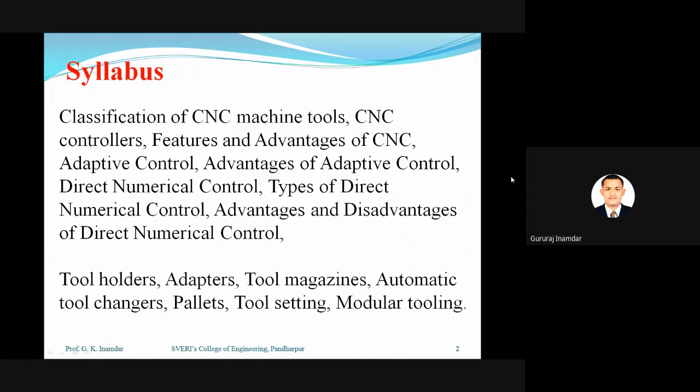This is a combined chapter. Already we have studied what is CNC. CNC is nothing but a numerical control system in which data handling, controlling sequences, and the responses to input are determined by an onboard computer. Only the computer system is added in between CNC and whatever the programmer does. This is the only difference between NC and CNC machine.

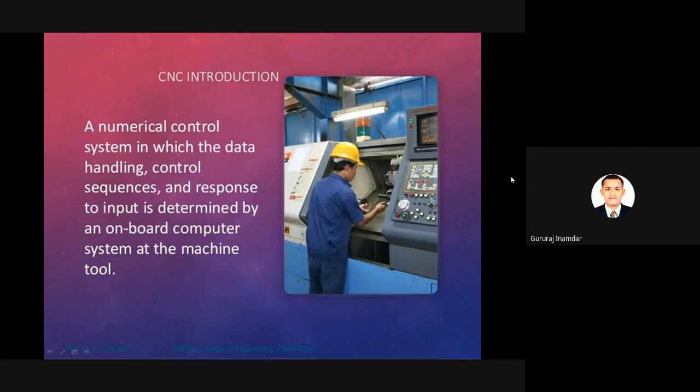Different types of CNC machine we already studied. So many types are there, as per industrial requirement or whatever the manufacturing requirement is concerned. We can manage, we can create a program as per requirement. For that purpose there are a number of CNC types. We already discussed that.

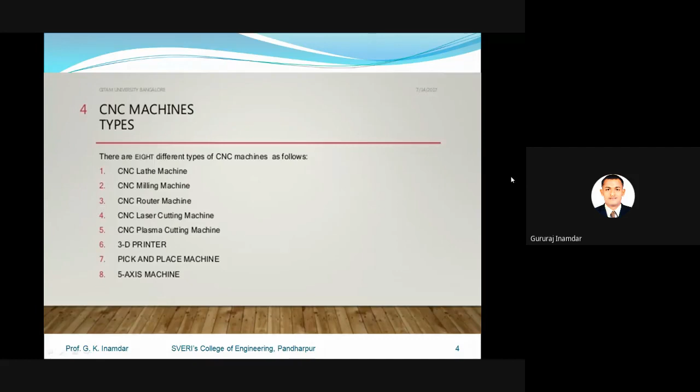CNC machine has two important parts: storage of data and data processing. Without computerization, man will not be able to store maximum data. Our pen or paper is very difficult to use to store data. For that purpose, we have used the computer system in the manufacturing system. Storage of data and data processing, due to numerical and mathematical problems, mathematical processes, becomes very easy for the computer. Controlling of that process is also very easy for the CNC machine.

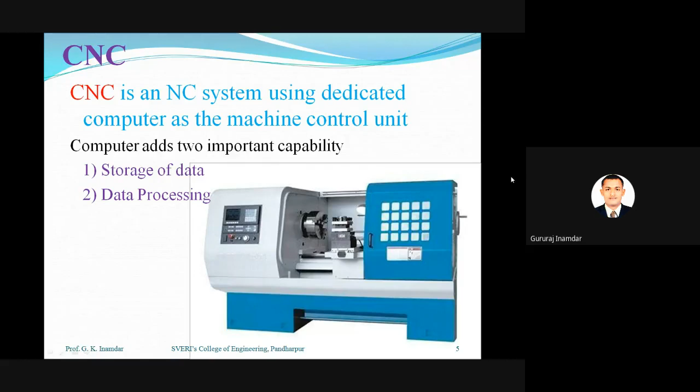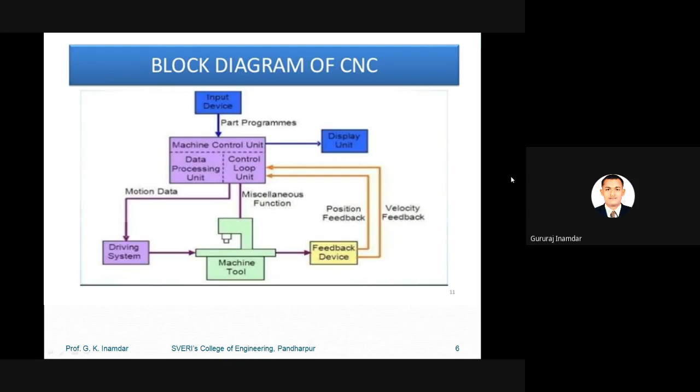Block diagram of CNC machine: only computer and the feedback system are added, whatever the miscellaneous functions, different driving systems, whatever the different sensors. Only these parts are added in NC system to become CNC technology, or CNC machine. Now, different controllers - what is the function of controller?

We already studied different components of the controller: power supply unit, whatever the electrical power, whatever the protection, circuitry protection. Whenever any failure happens, that will be protected by the circuitry protection system. Whatever motor drives are there, different motors are required for manufacturing or machining purposes in that CNC machine. Controlling of those machines or controlling of that motor is also the duty of the controller.

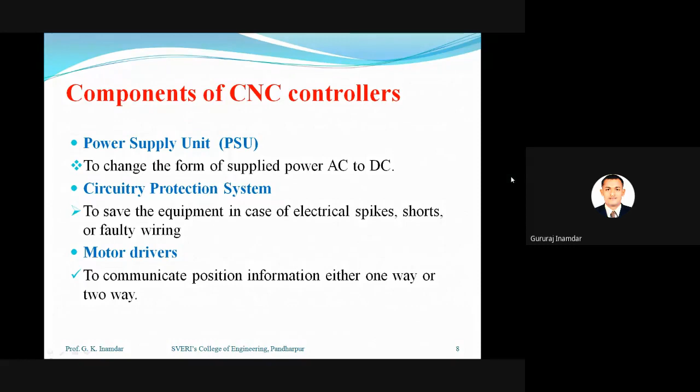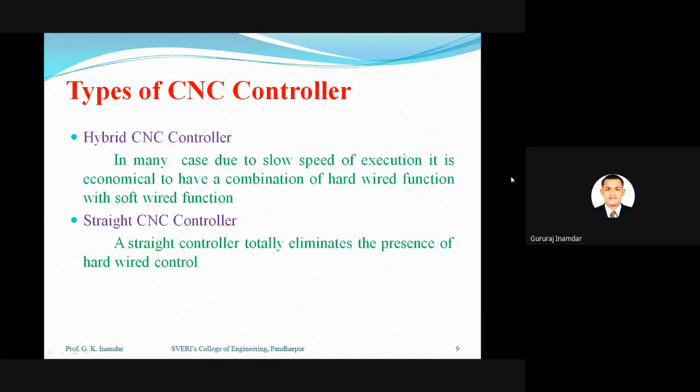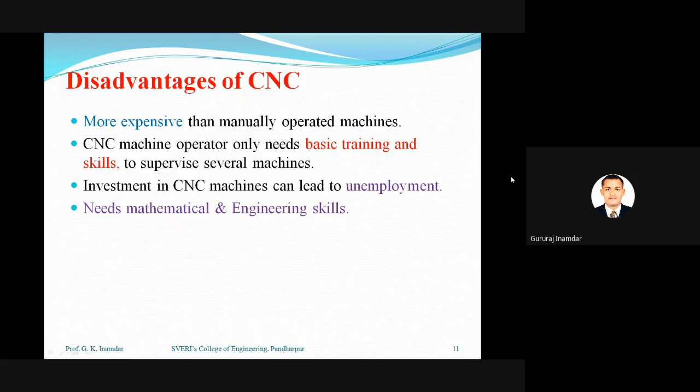Different types of advantages and disadvantages of CNC machine we already studied, as like NC system. Some disadvantages - already a huge discussion with students we have completed or finished on advantages and disadvantages.

Whatever the difference between NC system and CNC system, we will take revision also. What is the NC system? This system is a hardwired system which uses the PCB, printed circuit boards, and in CNC machine this uses PLC, whatever the programmable logic control units are there, in electrical or ENTC this type of circuit boards or that type of PLC units you might be knowing - only different ICs, different sensors are there, IC integrated circuits, etc.

Now what is NC system? It is simple to understand, and CNC system is difficult to understand and requires more skilled work - only this much difference is there. In NC system we are giving a program to that machine, but in CNC system the program is created by the machine itself according to your input values - there is no need to write the overall program for that machine. Suppose we want to give only the input, but in NC system we have to give the detailed programs.

These NC systems are less flexible than CNC, which is more flexible. Punch tape readers are required to insert part programs as input in NC. But in CNC, part programs are stored in the computer, so punch tape or different tape readers or cassettes are not required.

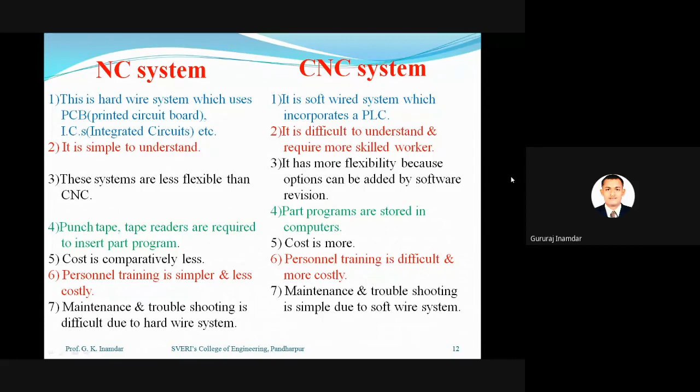This is a very simple difference between CNC and NC system. So our most important point now is DNC. We already studied NC, the numerical control system. CNC is nothing but computer numerical control, and DNC is nothing but direct numerical control. All these machines are numerical control basically, but the controller name itself indicates the difference.

Now, what is direct numerical control in very simple language? See the definition of direct numerical control: DNC is a system which integrates a number of machines by controlling them through a central computer by direct connection.

What is the basic difference? For a CNC machine, one single separate computer or controller system is required. But in a DNC machine, one central computer can handle a number of NC or CNC machines. This is the difference between CNC and DNC.

Suppose in this diagram this is the central computer, and we have given one program of a circular wall that we have to manufacture or machine. If you give the program through the central computer, then at a time, whatever number of DNC machines we have attached, that number of products will be manufactured at a time. But in a CNC machine, only a single product will be manufactured.

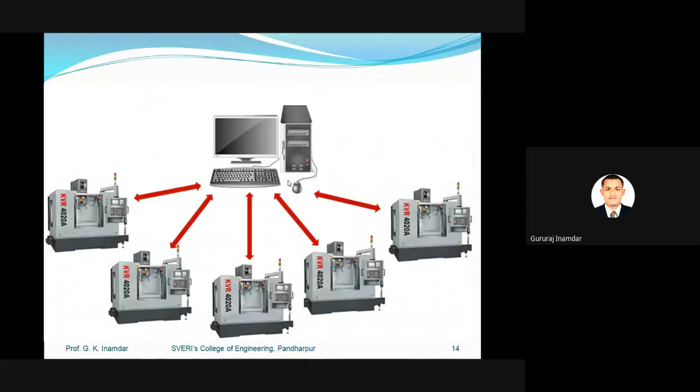So let's continue. Now, whatever the components of the information. Suppose I want, my expectation is to give any two components from your side. What will be the component of the DNC machine?

Anyone, I want answer from your side. Now, I think from the last 7 to 8 lectures we are studying NC and CNC machines. So whatever the components, same components will be required here also. So I require from your side, tell me the different components of the DNC control system.

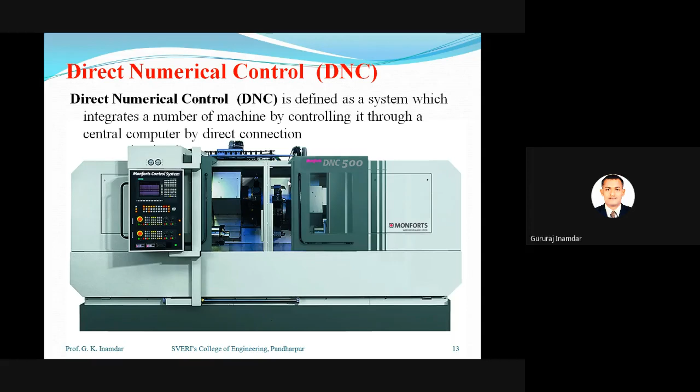But whatever additional components, different drives are required, whatever the motors are, whatever the sensors are - these are the different components required for the DNC machine.

So see here again, components of DNC machine: the central or mainframe computer. Here whatever the control unit, central component - what is the function of that? Central or mainframe computer is to call or send the part program to the individual machines as per requirement.

To convert whatever language to whatever is as per our requirement. Suppose whatever program, whatever component they have to manufacture, they have the requirement to manufacture. Now that programmer or manufacturer will give whatever program to that CNC machine, or input in terms of the CNC machine.

That CNC machine will transfer all the signals, all the material according to whatever conversion is required, for one language to another language, whatever conversion required for file format. Suppose we have given a file in terms of 3D drawing. That drawing will also convert into a CNC program. That CNC program will transfer to that machine equipment, according to whatever the language of that machine equipment.

Okay. Only 25 students are there. Why?

So the last component is a machine process unit, or process equipment, machine tools. These are the important components of the DNC machine.

So friends, this is a very important factor for whenever you will be in industry. Whatever the function of telecommunication lines, bulk memory, central mainframe computer - suppose in whatever manufacturing industry, suppose they want to hire you, they will ask you questions based on this.

Now recently in our college also, one MNC company hired a number of students from final year. In that also, very important questions were asked from this CAD CAM engineering background, because this company is basically from the mechanical background, or CNC DNC machine background. For that purpose, this is very important to keep in mind.

Please clear your doubts also. I am here to resolve, to remove your doubts - counseling to remove your doubts, this is my duty. But whenever you will ask, then I will give the answer, whatever the counseling. So I request, if any doubt will be there, definitely you may ask. Now these are very important factors.

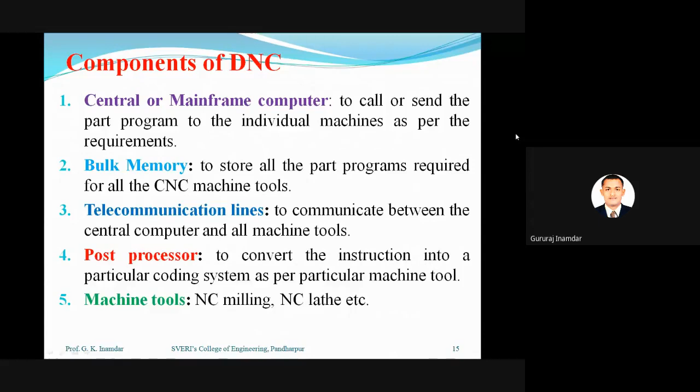So these are the components of the DNC machine. Now, types of DNC. There are basically two types of DNC: behind the tape reader system, and special - there are basically two types of DNCs. First type is behind the tape reader system, and second is special machine, whatever the special MCU, special machine control unit.

So what is the behind the tape reader? We already know what is a tape reader - tape reader is nothing but one type of input. So according to the name itself, they have given the name behind the tape reader system. So what is in this system? Computer is linked to the regular NC control.

Definitely as per our previous processor, our previous process, computer is linked to the NC controller, and the replacement of the tape, all the tape readers - the replacement of the tape readers by the telecommunication lines to the DNC computer is given by that behind the tape reader, BTR in short form. Suppose if you see in the diagram.

The telecommunication line is very important. In this system, computer is linked to the NC. Suppose this is the computer, central computer, this is linked to different DNC machines, or different CNC machines are there, different machine tools are there - for example, drilling machine 1, drilling machine 2, drilling machine 3, whatever n number of drilling machines will be there, and they have control.

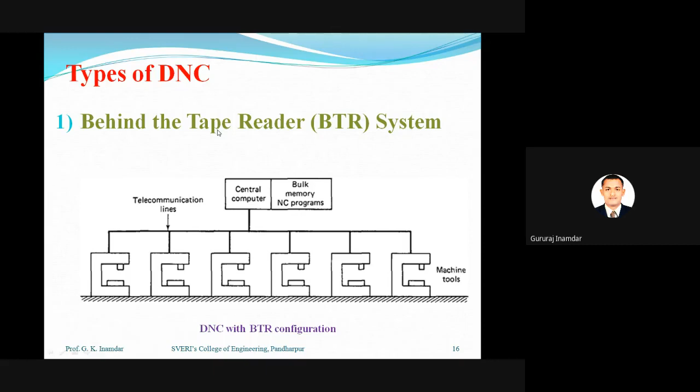Only whatever the replacement of the tape reader, whatever the replacement of the input - this happens in this type of DNC machine. This is a basic type.

BTR: the computer is linked directly to the regular NC system. Except for the source of the command instructions, the operation of the system is very similar to conventional NC. The control unit uses temporary storage buffers. This is very basic information.

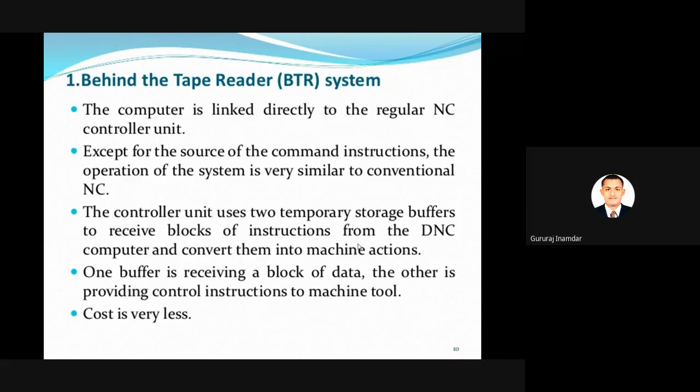Whatever the input we have given, that has to transfer. One buffer is receiving a block of data, the other is providing control instructions to the machine. Here the backup is very important - whatever extra memory is available, for exchange of the tape readers. According to the name also, they have named it behind the tape reader system. Very simple, and the cost is also very less.

DNC with special MCU - this is the second type. Now in this type, DNC eliminates the regular problems behind the tape reader. That will be removed in the special machine control unit.

Now, the machine control unit facilitates communication between the machine tool and the computer. This is the main function of that MCU. Now only a special MCU is added. What is the function of that special MCU? It facilitates communication between the machine tool, process equipment, and the computer.

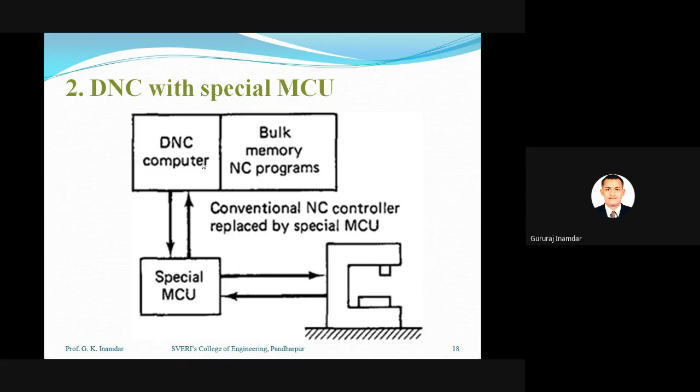Suppose if you require sudden changes - suppose I require a 5 mm drill, and I want to drill 7 mm instead, you can give direct access within a fraction of a second. This is very available. But previously, they had to change the input - whatever the tape reader, whatever the input, they had to give input again. But here, whatever the input, we can give directly. This is the only simple difference.

Now see the theoretical part: replace the regular control unit with a special machine control unit. Definitely, the regular control unit is nothing but the input processor - here the tape readers or whatever memory card, whatever signals, will be there. The special control unit is designed to facilitate communication between the machine tool and the computer.

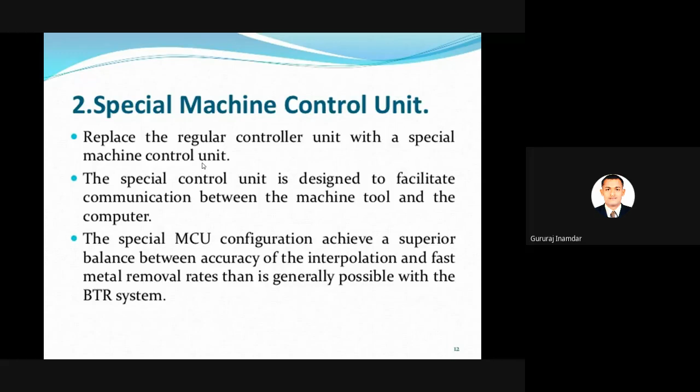The special MCU configuration achieves a superior balance between accuracy of interpolation and fast metal removal rates. This is generally not possible with the BTR system. Now the basic purpose of CNC and DNC machines is machining, and the machine metal removal rate is very important. According to this, the special machine control unit is better for the material removal rate.

Now the next point is the benefits or advantages of DNC. As before, it provides greater flexibility to improve or alter the methods - we can get greater flexibility in DNC. The second benefit is it eliminates the use of punch tape and tape readers, which were required in the NC system.

The third benefit is it has more computational capability because of the use of software rather than hard-wire devices. It has more computational capability because it involves storage in the control unit, due to the controller's transformation of one language to another, to calculate mathematical transformations - this is nothing but the more computational capability.

The fourth benefit is it collects, processes and reports the production performance data from the instruments - this is also related to backup. It collects, processes and reports the production performance data from the NC machines. It can take a record of manufacturing analysis, which can also be saved. This automatic recording, or automatic report generation, is also a benefit of the NC machine.

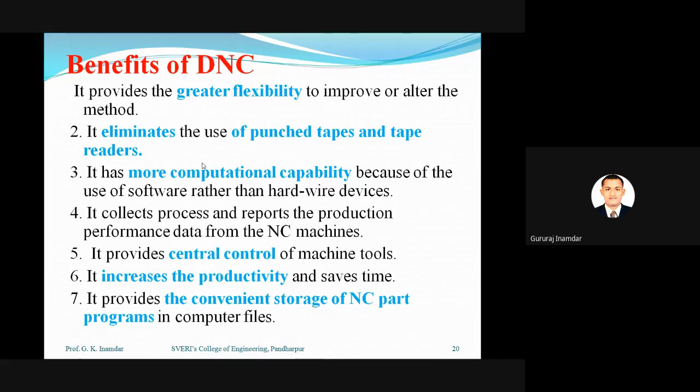It provides convenient storage of NC part programs in computer - a number of programs can be stored in the central computer. Whatever the drawback - high cost of computer hardware. Definitely the cost is high.

The number of machines which could be controlled by one computer was limited - this is a limitation. For example, maximum 8 or 10 machines may be there for the controlling. This is some of the limitation, but currently in industry, a number of advanced machines are also available.

A computer software was limited for maintenance, scheduling, control, and data collection. The backup computer was usually required. Definitely, the computer software was limited for the maintenance.

Scheduling is nothing but whatever the data, whatever the methodology of that manufacturing process - all the data for storage or for backup of that data. Very costly computers are required, in terms of different hardware and software. So these are all the drawbacks of DNC.

Okay, so this is all about the DNC machine. So any doubt? I think 2:30.

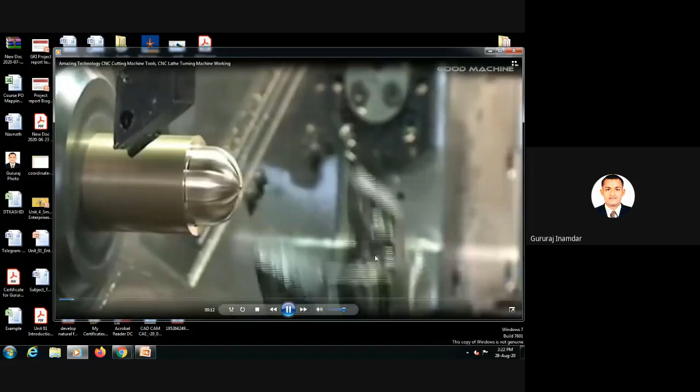So whatever the time required for the transformation of the tool - meaning if we are moving the workpiece tool, whatever the time required for that movement, for that purpose we are using different motors. Now the role of that motor is very important. Suppose this is a facing turning operation - now whatever the required time for that tool, for example this is whatever the tool.

This is a transformation of that tool from one phase to another phase. Otherwise, this is nothing but wasted time. Consider the finishing time here as 5 seconds, but changing the tool and its location also takes time, which is very important. Whenever we reduce that time, our production rate will definitely increase.

This is the main factor of the adaptive control system. Adaptive is nothing but additional, or innovative. Now there is an innovative control system. So what will be the solution for that?

Definitely there will be a high power or high speed motor. In a fraction of a second, the tool will change according to the requirement, and this is nothing but adaptive control. In a fraction of a second, in very less time, the tool will change. This is an important factor of adaptive control.

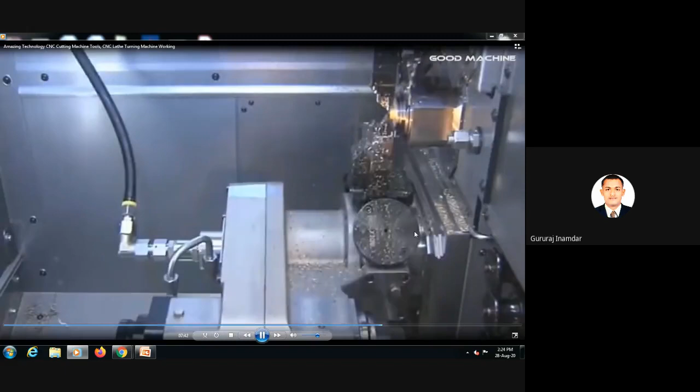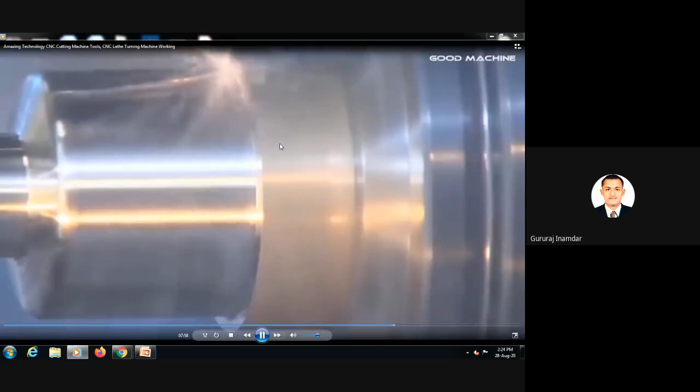See here, this tool will move from here to here. This is working time, but non-working time is whatever time is spent in between changing the tool, and that time will be reduced.

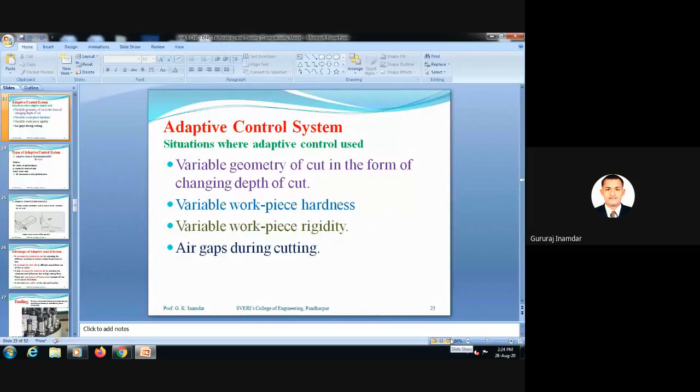So adaptive control is nothing but reducing the process machining time. Whatever the process machining time is, that will be reduced. This is one system - whatever the standard system, adaptive control system, or innovative control system.

What is the objective of that adaptive control system? To optimize the production rate, definitely to optimize the production rate. What is optimize? Within less time, maximum production will be there. It also helps to optimize the product quality.

Definitely, product quality should also be increased in the adaptive control system, whenever we use the adaptive control system.

To minimize the cost - now which cost? Whenever the process machining time is reduced, definitely what will be reduced? Definitely the lead time will be reduced, and overall manufacturing time will be reduced.

Definitely electricity will be reduced, and the time will also definitely reduce - these are the benefits. Whenever time reduces, definitely electricity will reduce, and due to the time reduction and electricity reduction, our investment will also reduce.

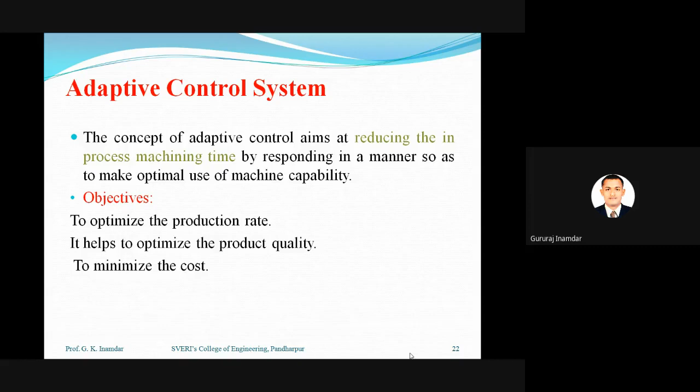This is nothing but minimizing the cost - whatever the investment cost, the initial cost, will definitely be reduced. Whenever cost reduces, minimum cost, definitely profit will be increased. This is a very important factor. Adaptive control system is nothing but an advanced or innovative control system.

Now, situations where adaptive control is used: variable geometry of cut in the form of changing depth of cut, where adaptive control system will be used. First example is variable geometry of cut, in the form of changing depth of cut, wherever different depth of cut is required.

As we already studied in the previous video, within a fraction of a second they have to change position, whenever different types of depth are required. For example, in turning, taper turning will be there, and definitely feed rate will be reduced or increased. Controlling that feed rate within very less time, to fast-track the transformation of the machining tool - there definitely this adaptive control system will be used.

A second situation is variable workpiece hardness. For example, suppose one workpiece is added, but in that workpiece there is different hardness - definitely there the adaptive control system will be required.

For example, suppose some 10 units hardness at 50 diameter, and 12 units hardness at the next 20 - definitely there the tool will be changed. But for changing that tool, definitely time will be wasted. We have to reduce that tool changing time with the help of the adaptive control system. For that purpose also, this system will be used.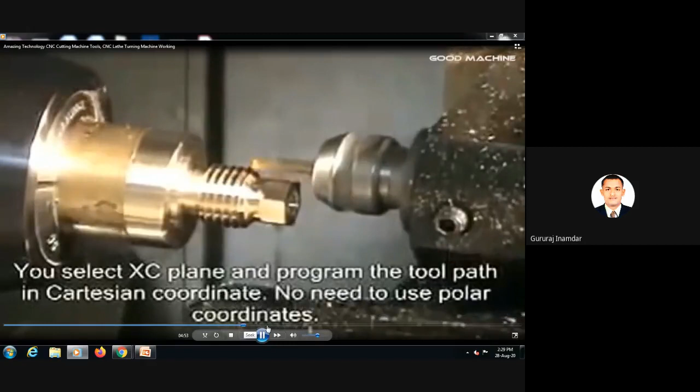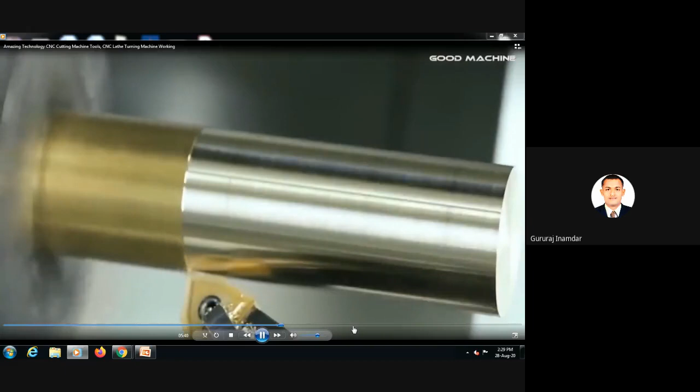Here, after completion of that workpiece, this is the coding system. After completion, there will be tool cutting, and again another tool will come and another operation will start from here. Now this is a continuous process - one longer shaft is inserted into that process equipment. Definitely after the cut, the other part will be there. After completion of this workpiece, that workpiece cutting air gap will be there, and that will be also.

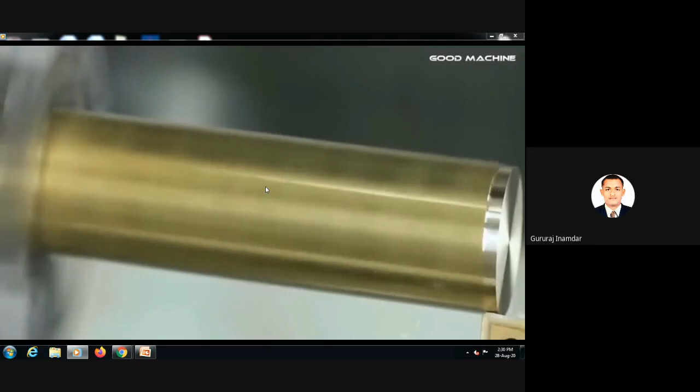Here the workpiece is completed, automatically the workpiece will be cut. Now to exchange another workpiece, that time will also be reduced. This is also the concept of adaptive control system. Is it right?

Now these are the examples of adaptive control. Now here are the types of adaptive control. Now what is the aim of adaptive control?

It is nothing but to reduce the process machining time, to increase the overall performance.

In the mathematical equation, they have given adaptive control optimization in terms of IP equals mu divided by tau. So IP is nothing but the index of performance or the overall performance of any machine. Now it is based on the material removal rate and the tool wear rate. This is the standard formula for the optimization, adaptive control optimization.

Now adaptive control optimization is nothing but the ratio of material removal rate to tool wear rate. This is the overall performance - overall performance is nothing but the adaptive control optimization. We have to increase, maximum we have to increase the material removal rate, and definitely our output will increase. This is the mathematical part.

Now second, adaptive control constraint - this is also one of the types. Adaptive control optimization is nothing but the material removal rate should be maximum according to the tool wear rate. According to the tool wear rate, the tool should be replaced whenever the wear will be there. One tool will be used maximum for a certain lifetime, after that the tool will not be required. Suppose you are having experience in the workshop.

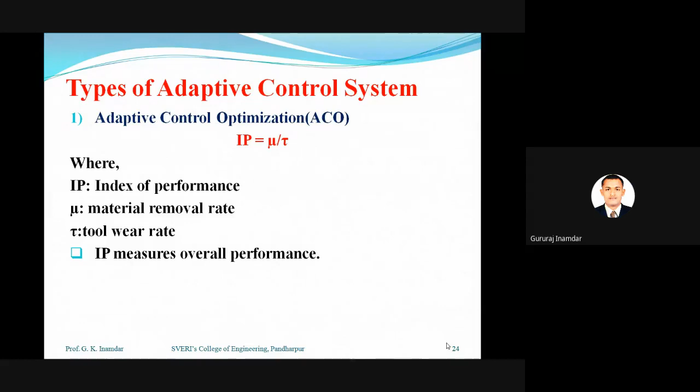Adaptive control optimization formula gives the overall performance. Second is the adaptive control constraint - process variable parameters such as torque, force, vibration etc. are used, whenever variable parameters such as torque, force, vibrations occur.

According to that, we have to increase - suppose if you are having very less vibration, definitely our output will be maximum. Vibration is also very difficult for manufacturing, this is also very critical to produce a finished product.

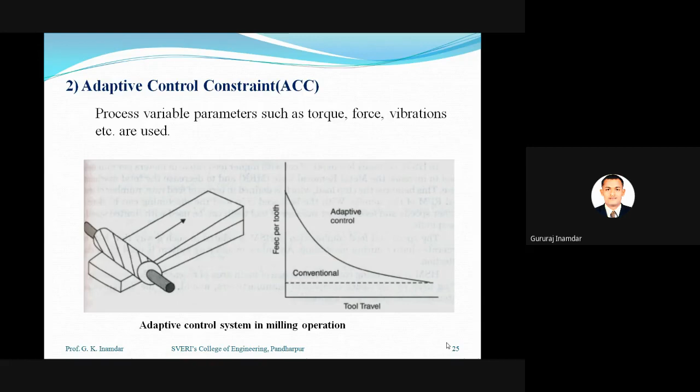The suitable torque and force will be given by the adaptive control system. The control of torque, force, and vibration is also part of the adaptive control system. That ACC is nothing but the adaptive control constraint that will manage all these parameters such as torque, force, vibration, etc., for better finishing or better output. This is a second type of adaptive control system.

Again, very simple advantages and disadvantages. Advantages of the adaptive control system: it increases the production rate.

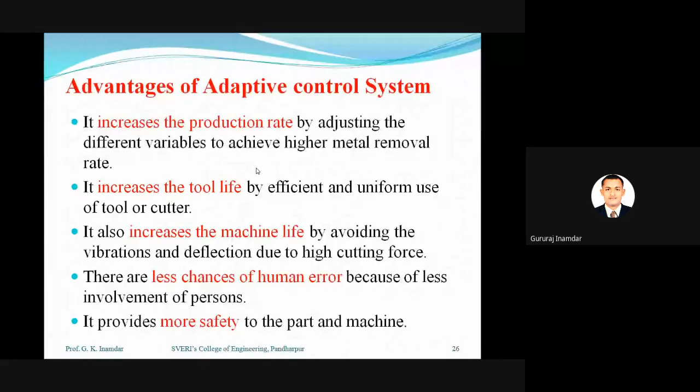Our next point is tooling.

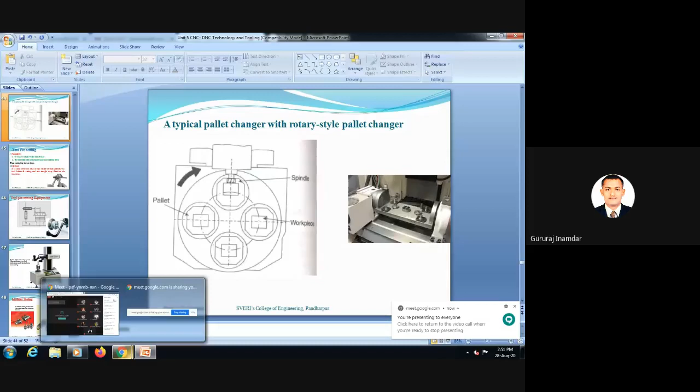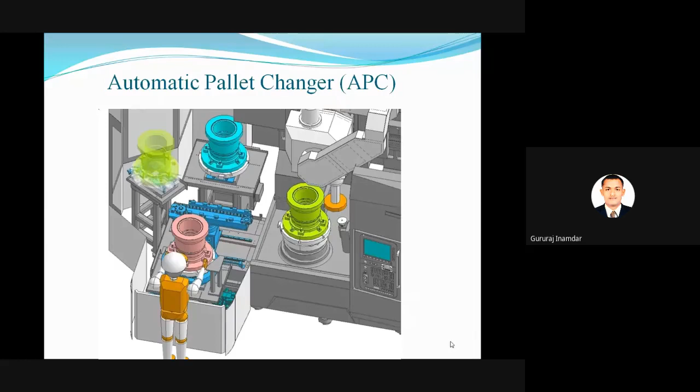Okay, in the next lecture we will study the tool, the overall part of the tool. Only about 30 minutes are there, so we will continue this lecture. I think you have only seen the PPT, but my voice was interrupted. So let it be, we will only study this tool type in the next lecture.